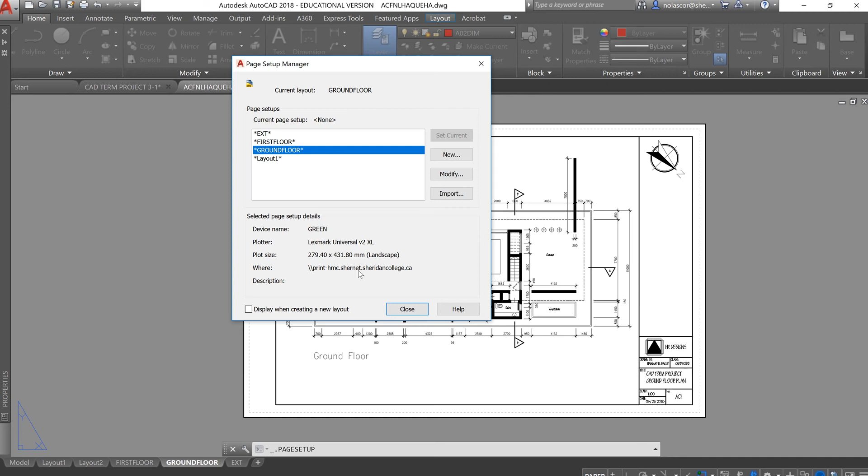These are the different layout tabs, so you can still change the layout tab that you want to change, and then you click Modify.

Here you want to set first your printer. Select the printer that you want to use, and make sure that printer is able to print an 11 by 17 paper, or 279 by 432 in millimeters. Then select tabloid. I find tabloid the best for an 11 by 17 print.

Make sure you select layout for what to plot. You can plot the display, whatever you're displaying, or the extent of your drawing, or a window, where you window an area that you want to print. I find layout best because I'm printing my layout tab, or the paper.

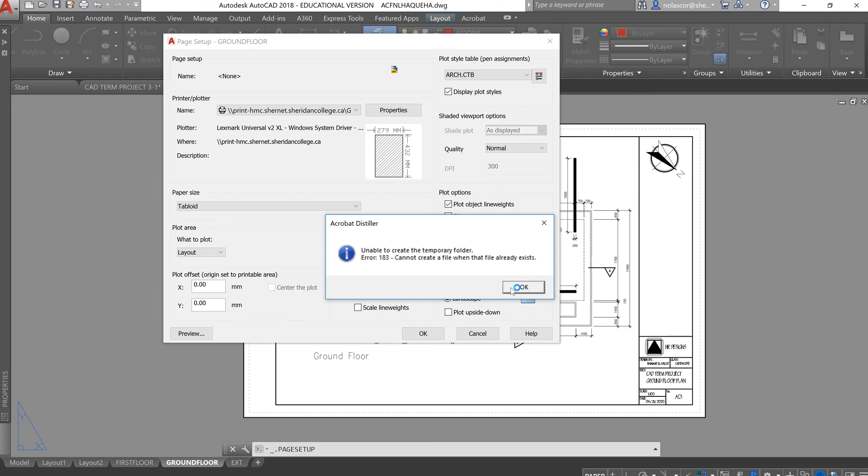Since this is metric, I'm going to choose millimeter. If this is imperial, I would have chosen inches. Since I'm plotting the paper itself, I'm printing it at 1:1. Here you're scaling the layout, not your drawing. So this is 1:1, meaning print the whole paper, which is your tabloid size paper. That's why you're printing it in full scale.

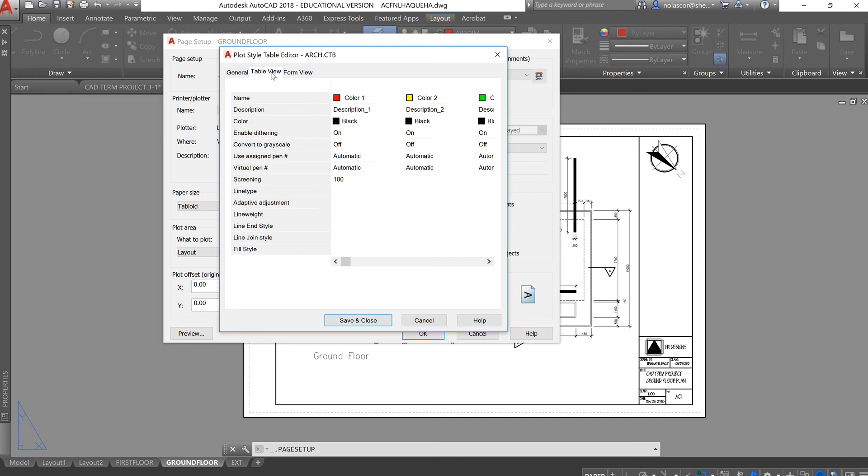Make sure you have ARCH.CTB selected. ARCH.CTB simply has this table. So if you edit this, you'll see that color 1, which is red, is assigned to be printed in black with a specific line weight. You can view the table here and see the different colors we normally use for our standard colors, 1 to 9.

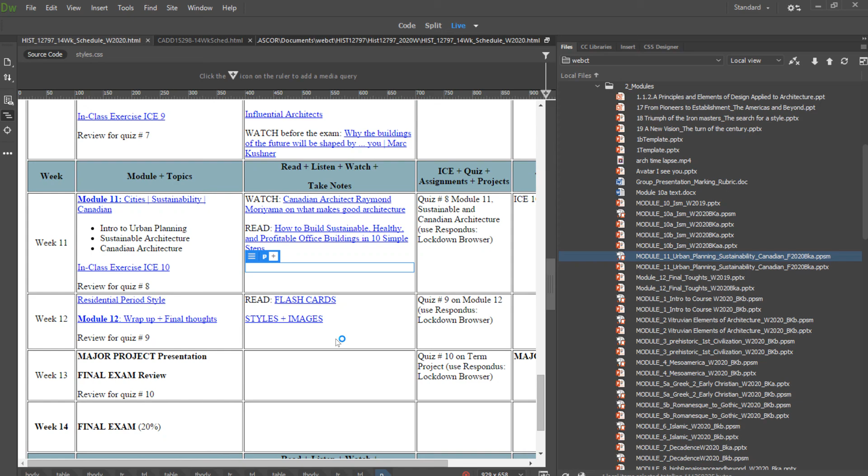Colors 1 to 9 will all print in black. Notice that the rest of the colors will print using their color object, which is nice because if you use color 10, it will actually print in our school printer in gray tone, which is nice because that gray tone can actually be something you can use to make your drawing look a lot better.

And I have here in our CAD standard all those gray tone colors. So you can see here chroma gray. If you use the different colors, it will actually print this way.

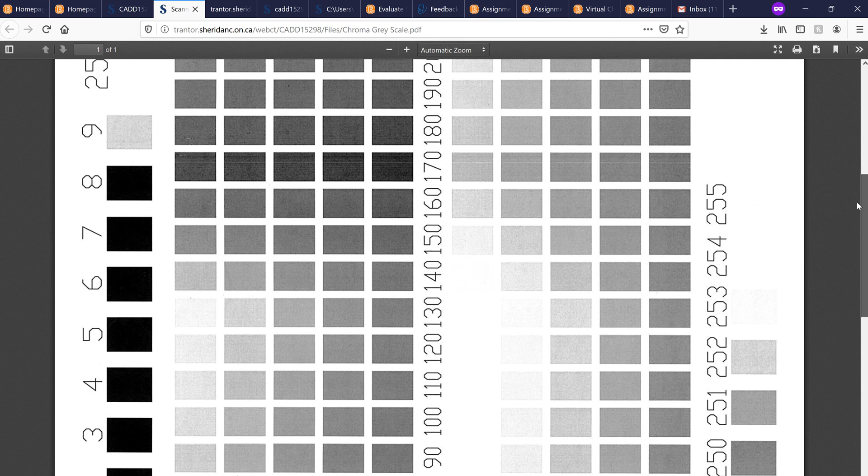Colors 1 to 9 will print in black. Actually this one is showing gray, but that will print in black. If you print it using the color object color, it will print this way. So there are different tones of colors which you can use for hatching, to make your drawings pop out, and you can definitely use all these different colors.

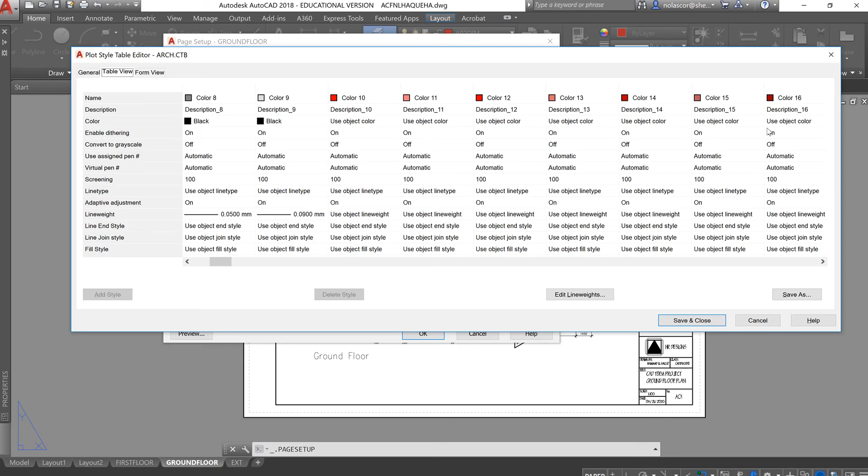So if you want something darker, choose something along this line, but not as dark as black. If you want something lighter, you can choose any colors along this line, which I'll show you later. So those are the different colors and the different line weights.

So you see here color 1 will print at 0.13, color yellow at 0.5, color green at 0.13 as well. Cyan is the thickest, at 0.7. You can definitely assign any line weights here, this is just our standard color and line weight assignment. So color 5 or blue is 0.5, magenta is 0.25, color 7, which is white - sometimes it's white, sometimes it's black depending on your background - will be 0.25, and color 8 will be 0.05, and color 9 is 0.09.

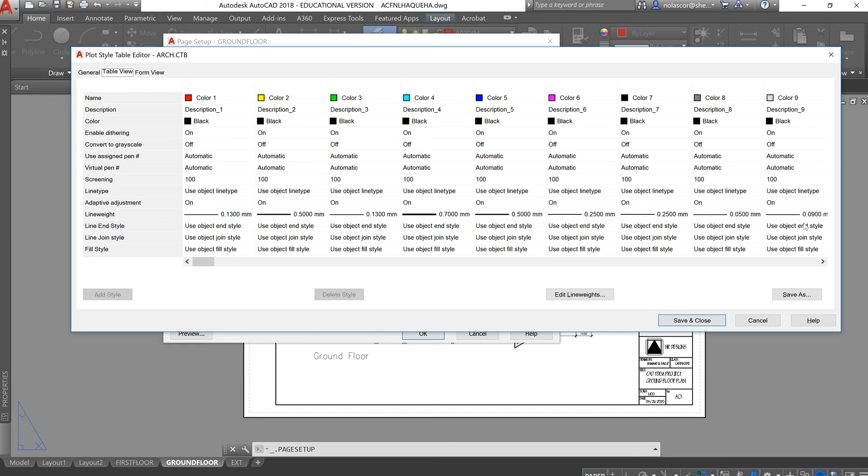Okay, so... oops, what did I do? I think I said cancel. Let me double check. Printer, tabloid, yeah, everything looks good.

Display plot style - make sure you check this so that your ARCH.CTB plot style will appear or show. Plot line, object line weight, yes. Now plot transparency - some use transparency, like making your black gray or having some transparency, then you can select plot transparency. Plot with plot styles, yes. Plot paper space last, yes.

Hide paper space - you don't want this checked because you do want to print your title block, which is in paper space. So remember, anything inside this viewport is in model space, outside of that is in paper space. It's like you're drawing on the paper.

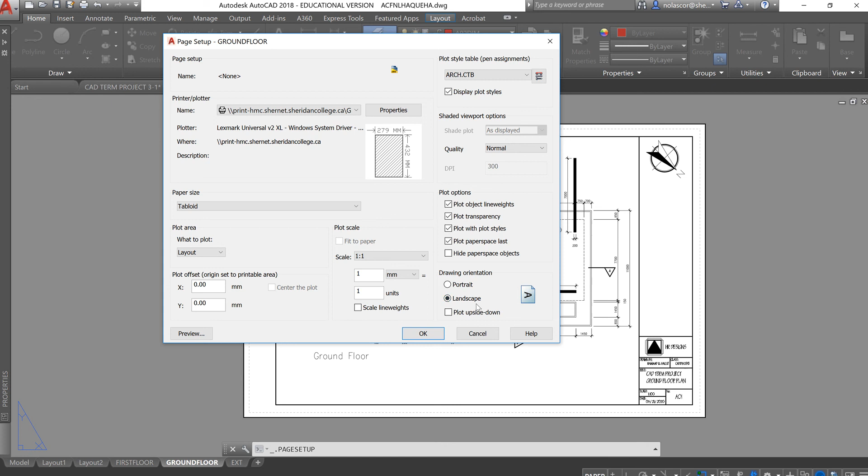We're plotting using the landscape format, so that's good. Always check for a preview so that you see exactly what you will get. Once you're happy with what you are seeing by way of plot, you can right click and say exit, then click OK to accept your settings and close.

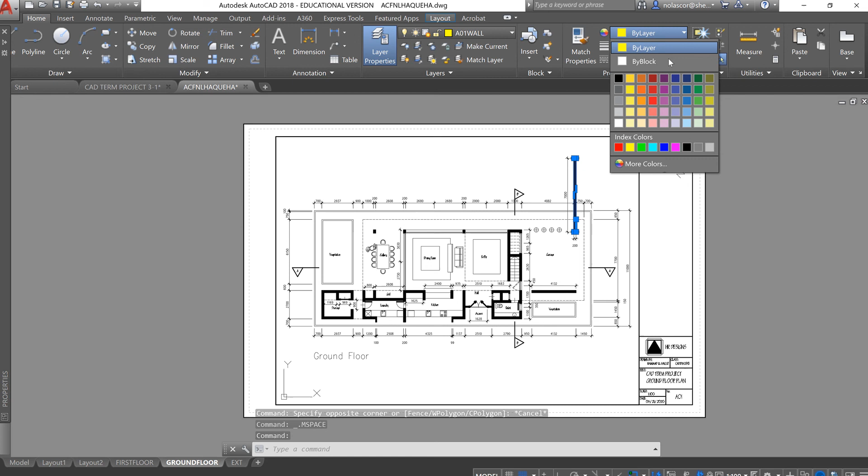Okay, so again, you can always select an object and change the color here. You can select the different colors that I've shown you earlier, or say more colors, and this is the table of color swatches that I've shown you earlier. So you can choose any of this for a gray tone plot.

Okay, so that's how you set up your paper or page.